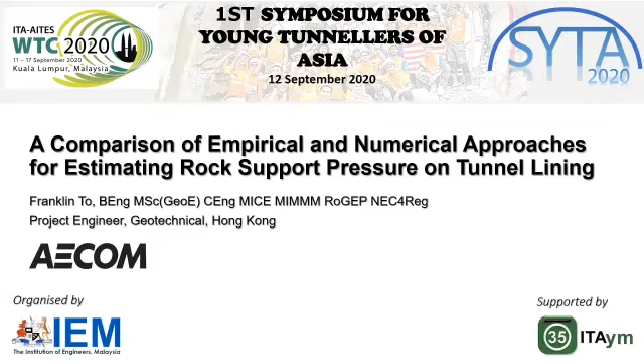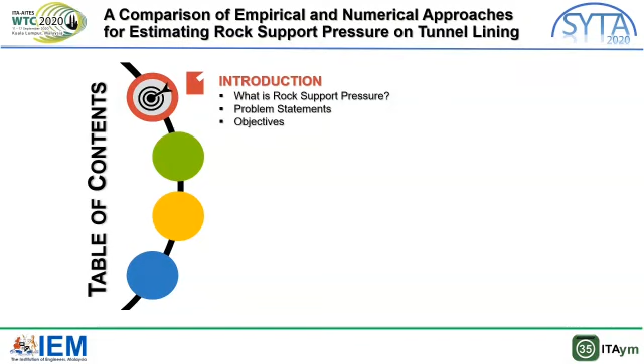Today's presentation is divided into 4 parts. First, I'll introduce the background of this study. Then I will quickly go through some previous literature. After that, I will talk about the methodology for this study. And finally, the results and discussions.

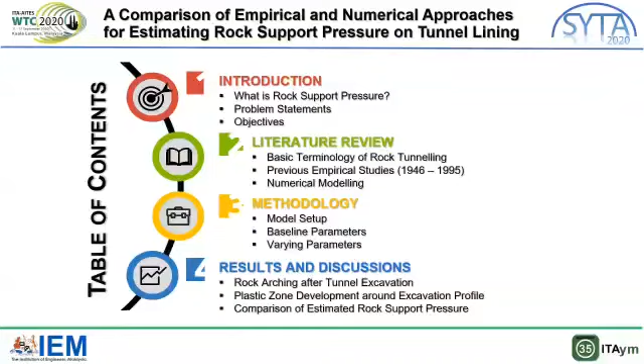So first, the introduction. Hong Kong is a densely populated city with 7.5 million population. However, less than 25% of the total land area is developed. This is because the remaining areas, highlighted in these red boundaries, are surrounded by hilly terrains, rural areas, and statutory protected areas. 85% of these hilly terrains are underlain by hard and massive igneous rock, such as granite and volcanic tuff. They are favorable for underground space development, such as rock tunnels and rock caverns.

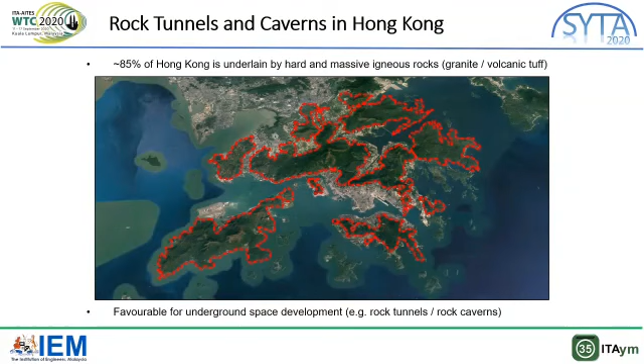Indeed, many railways and highways in Hong Kong were constructed in the form of tunnels, such as the Lion Rock Tunnel on the left, the Tai Koo MTR station in the middle. Most of them are supported by permanent cast-in-situ concrete lining, shown on the right.

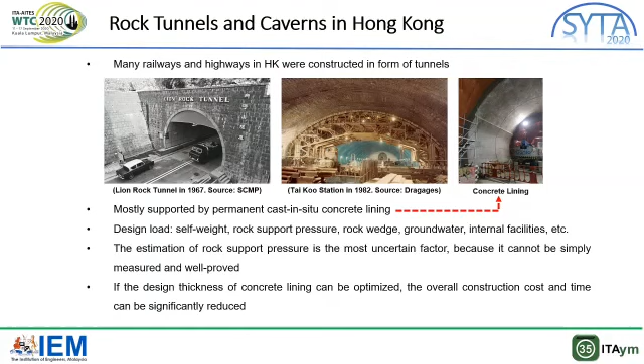Design loadings include the self-weight, rock support pressure, rock wedge, groundwater, internal facilities, and so on. Among these loadings, the estimation of rock support pressure is the most uncertain factor because it cannot be simply measured and well proved. If the design thickness of the concrete lining can be optimized, the overall construction cost and time can be significantly reduced.

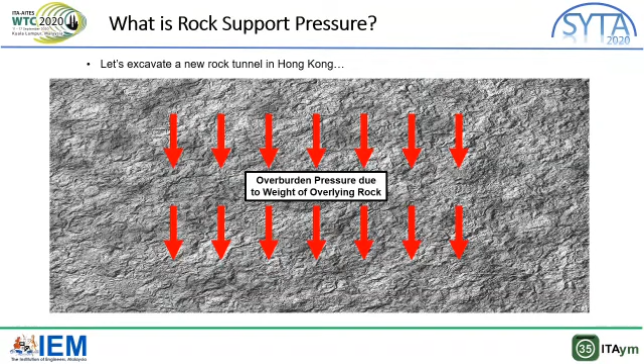So what is the rock support pressure? Let's excavate a new rock tunnel in Hong Kong. Before excavation, the stresses are downward due to gravity from the overburden pressure. However, after excavation, the stresses are redistributed. This loosened rock will exert a rock support pressure, and as engineers, we need to design this support.

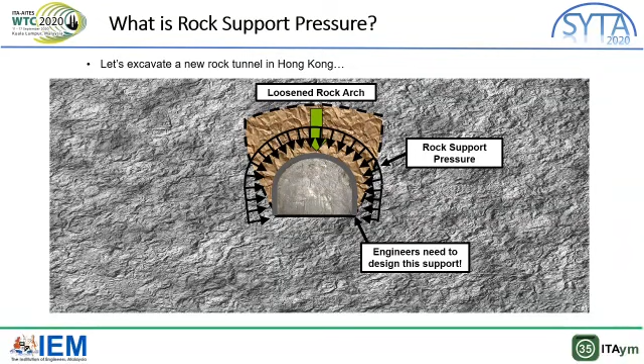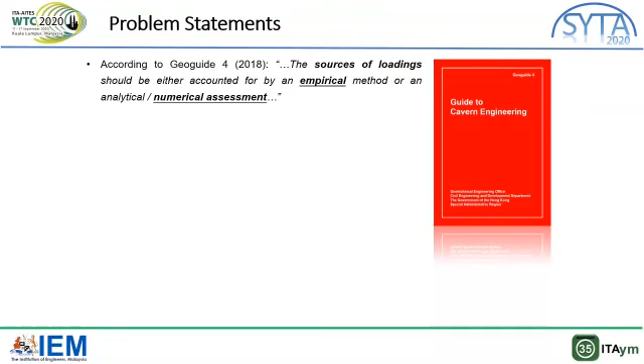According to GeoGuide 4, a guide to cavern engineering published by the Hong Kong government, the source of loadings should be accounted for by either an empirical method or an analytical or numerical assessment. So what are they? Empirical approaches correlate the relationship by observation or experiment. For example, if you get a group of data, you can get an equation with the best fit line of y equal to mx plus c. On the other hand, for numerical modeling, you solve problems by numerical approximation, such as computer modeling with the finite element method or the discrete element method.

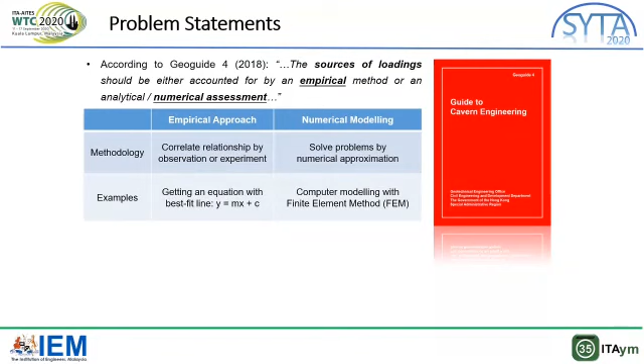So for rock tunnel design, there are 2 major types of parameters. The first is the geotechnical conditions, such as how strong or weak the rock is. The second is the tunnel arrangement, such as how deep and wide we need. So the question to ask today is, are geotechnical engineers estimating the rock support pressure with full consideration of these parameters?

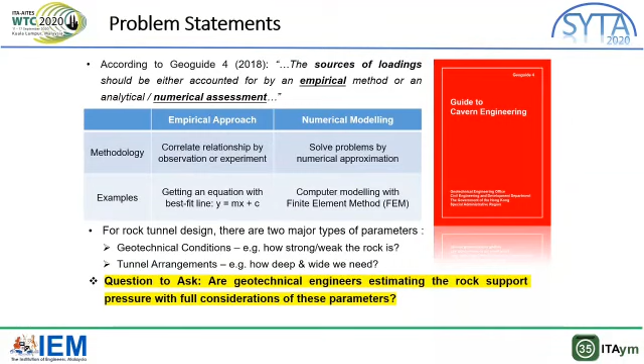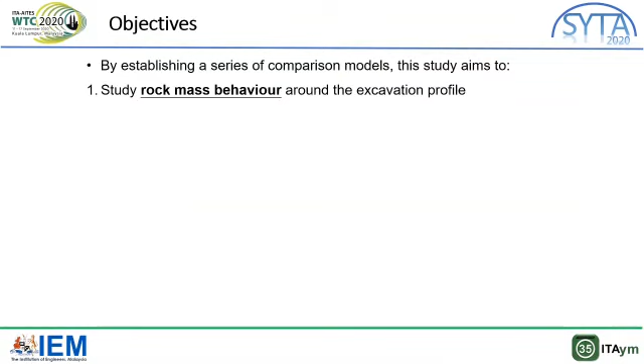By establishing a series of comparison models, this study aims to study the rock mass behavior around the excavation profile, and investigate the difference in estimated rock support pressure using empirical approaches and finite element models. Due to time limitation, I'll only talk about the Terzaghi's and Barton's methods for the empirical approaches, and only the crown pressure from the finite element modeling. And finally, study the influence of missing parameters in empirical equations.

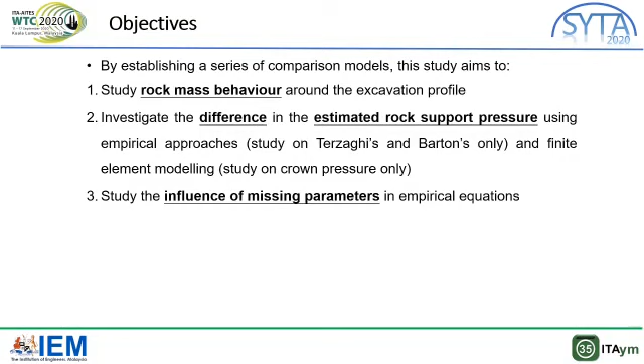So, literature review. Before going into details, I would like to first quickly introduce some basic terminology of rock tunneling. First, the tunnel width, which is the maximum width of the excavated profile, including the tunnel lining.

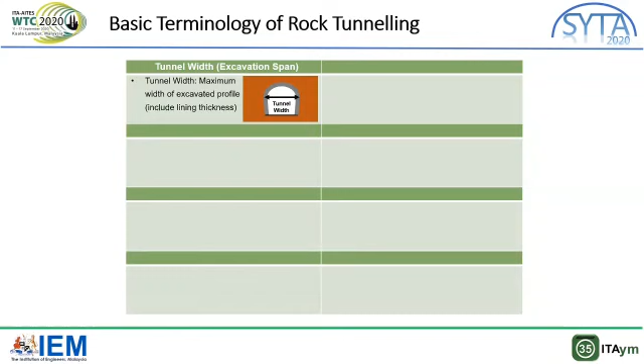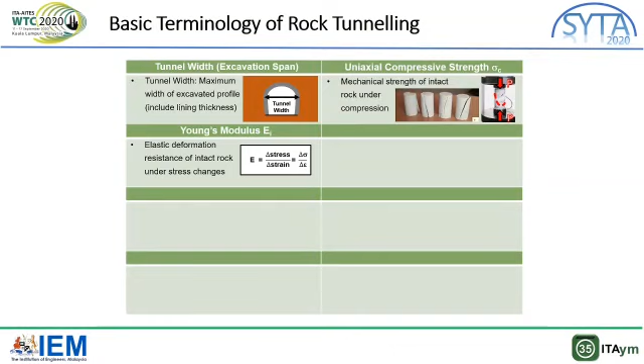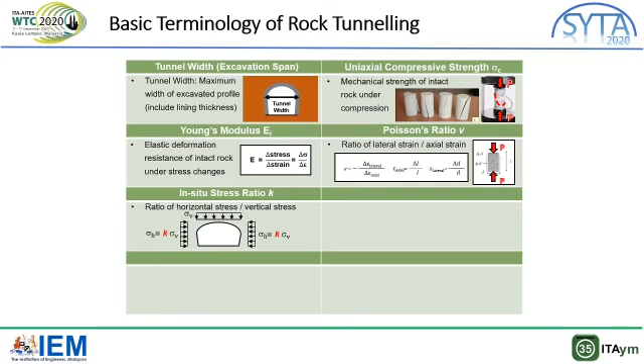Uniaxial compressive strength, or UCS, is the mechanical strength of intact rock under compression. Young's modulus is the elastic deformation resistance of intact rock under stress changes. Poisson's ratio is the ratio of lateral strain divided by axial strain. In situ stress ratio, the K value, is the ratio of horizontal stress divided by vertical stress. A higher K value means higher horizontal stresses.

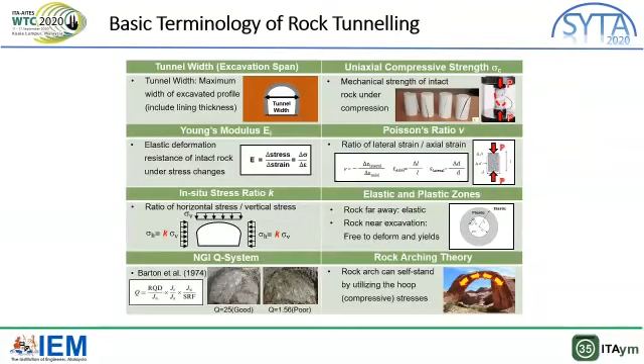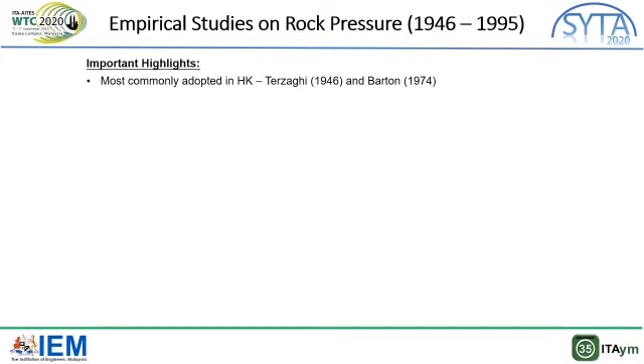I have extracted some important highlights of previous empirical studies. The most commonly adopted ones in Hong Kong are Terzaghi's rock arching theory from 1946 and Barton's Q system from 1974. These studies were carried out by collecting field data of relatively small tunnels, and the design loadings are actually from back analysis of installed tunnel supports.

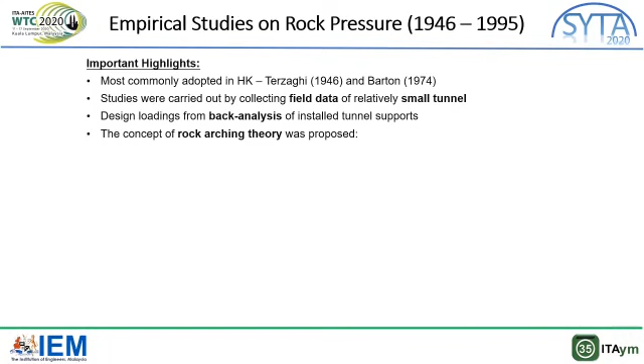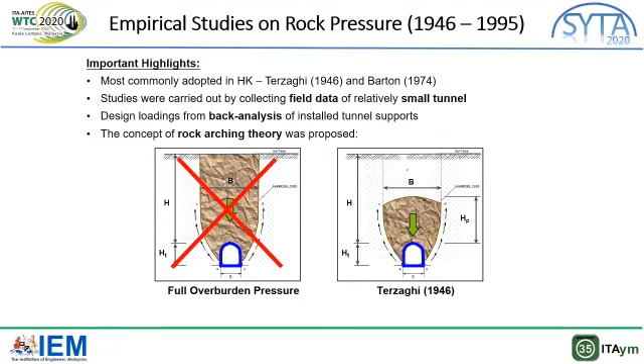And the concept of rock arching theory was proposed. So instead of taking all the ground loadings, the full overburden pressure up to the ground surface, the tunnel is only taking the loading from this loosened rock arch zone by considering the arching effect. They are very fast and easy to use, and therefore they are still widely used in the world nowadays.

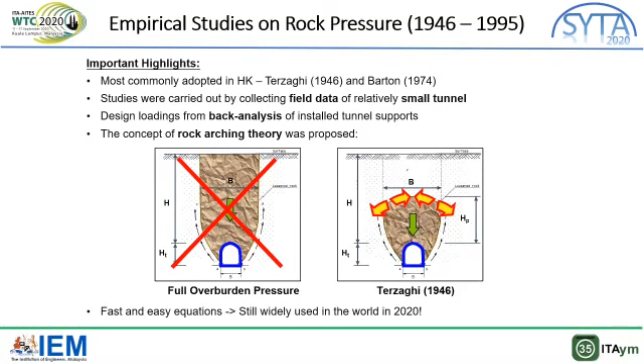This shows the input parameters into the empirical equations by Terzaghi and Barton. As you can see, the UCS has been considered somehow in the SRF by Barton. The tunnel width has been considered by Terzaghi, and both approaches have considered rock mass quality. However, none of them have considered Young's modulus, Poisson's ratio, in-situ stress ratio, and also tunnel depth.

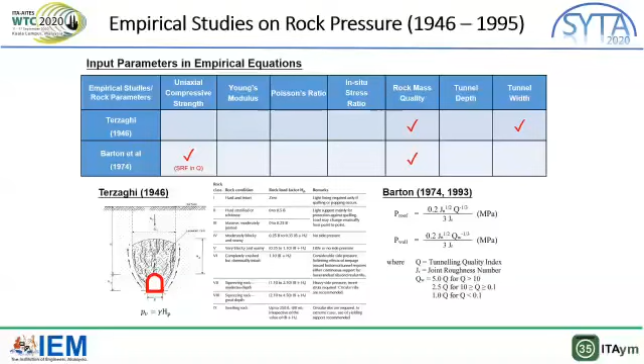On the other hand, numerical modeling can be used to handle engineering problems with great complexity, such as surcharge, complex geology, influence to existing tunnels, excavation sequence, composite structures, and 3D problems.

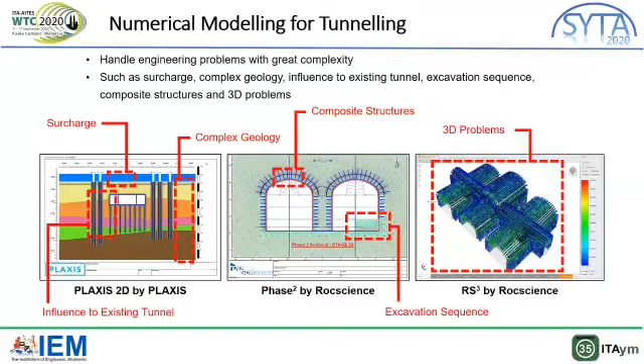So, methodology. The first thing is model setup. Comparison models were established using the software by Rocscience, which is Phase 2. Something to mention is that all geotechnical software in Hong Kong to be used for design works has to be pre-approved by the Hong Kong engineering government authorities. The geotechnical and geological parameters and also the tunnel profile are based on the Hong Kong Highway project.

So there are 4 stages of modeling. Stage 1 is the initial stage. Stage 2 is the excavation stage. Stage 3 is the support installation. And stage 4 is the full excavation.

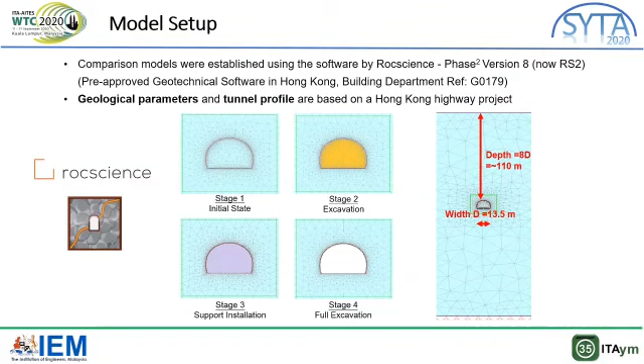The tunnel span is approximately 13.5 meters, and the tunnel depth is 8 times the excavation span, which is approximately 110 meters. These are the baseline parameters: the UCS is 75 MPa, Young's modulus is 30,000 MPa, the Poisson ratio is 0.3, and the Q value is 10, which is fair to good rock.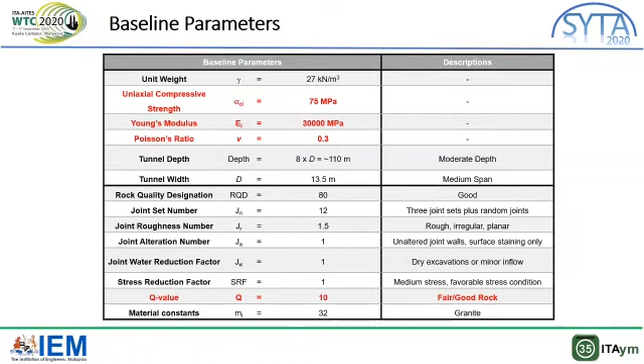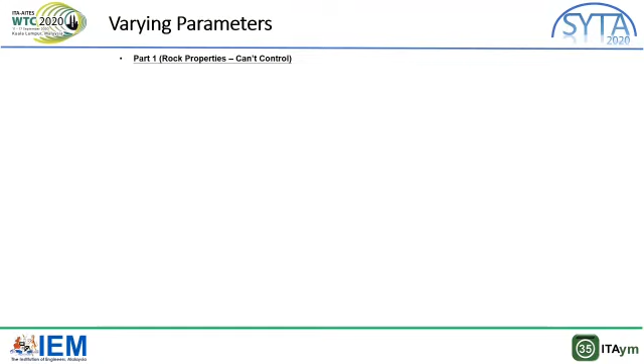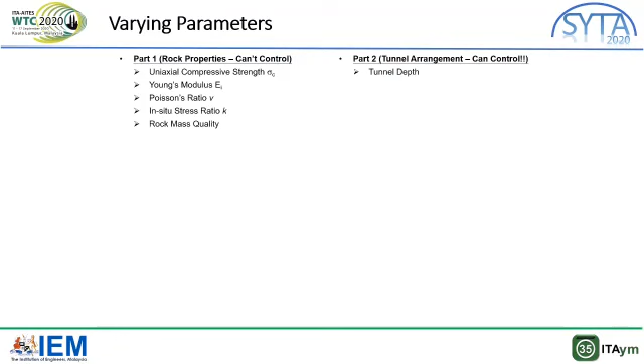This study is divided into two parts. The first is rock properties which we cannot control, including UCS, Young's modulus, Poisson ratio, in-situ stress ratio, and rock mass quality. The second part is tunnel arrangement which engineers can actually control, which is the tunnel depth and tunnel width. This is a summary table summarizing the baseline and varying parameters.

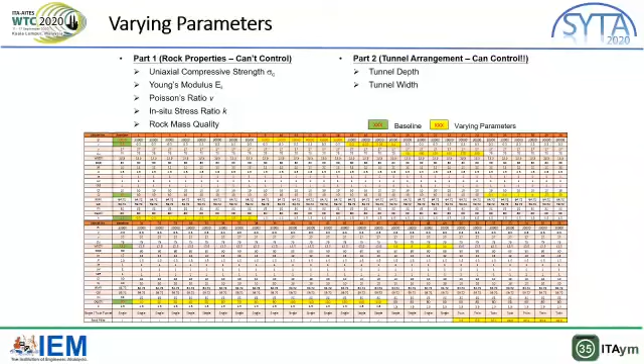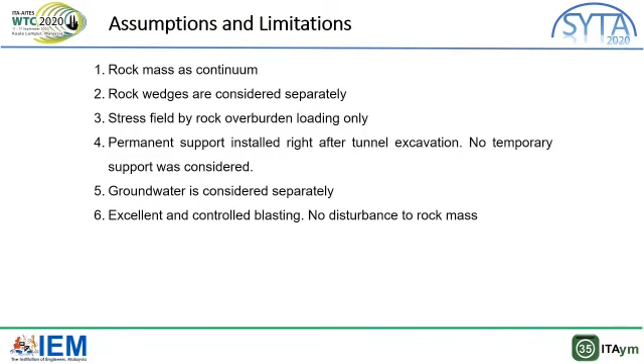And finally, with advanced technology, we assume excellent and controlled blasting, and therefore there is no stress disturbance to the rock mass. Finally, the results and discussions.

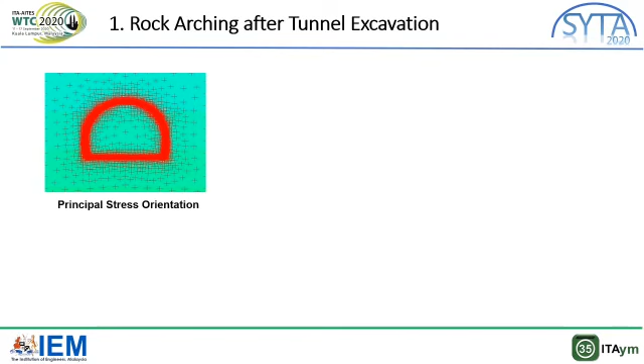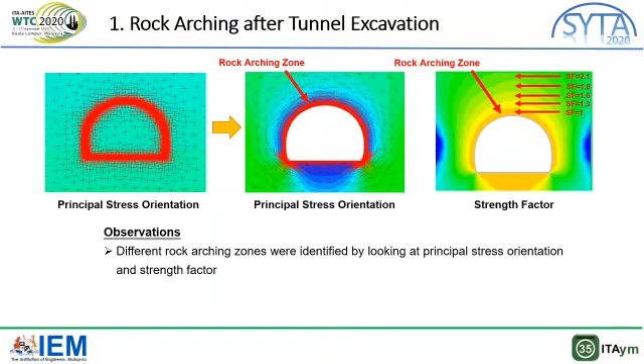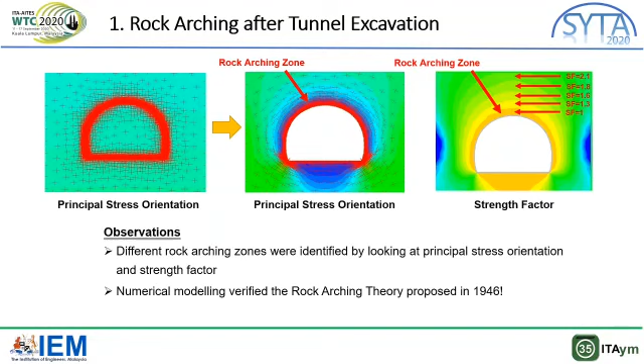Also, when we look at the strength factor, near the excavated profile the strength factor is around 1. As the rock mass moves away from the opening, it increases radially from orange to yellow and finally to green. So we also observe the rock arching zone here. Different rock arching zones were identified by looking at the principal stress orientation and strength factor, and therefore the numerical modeling actually verified the rock arching theory proposed in 1946.

These show the stress contour at different tunnel depths, by the multipliers of excavation span D, from 1D to 15D. Similarly, rock arching zones were observed in these comparison models. This implies that the permanent lining of a rock tunnel at moderate depth is only supporting the loosened rock mass after excavation, instead of the full overburden pressure to the ground surface. However, by carefully looking at the color of the stress contours, we can see at 15D they are more green and yellow. We can observe a slow increasing trend of the support pressure with increasing tunnel depth.

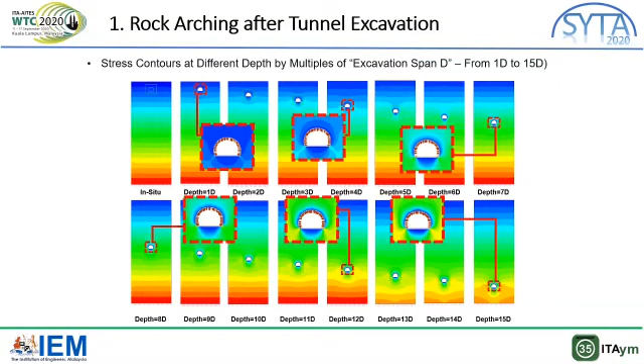This shows the plastic zone development around the excavation profile at different tunnel depths, from 1D, 5D, 7D, 9D, 12D, and 15D, from the upper left to the bottom right. We can see that the extent of the plastic zone increased with depth. The plastic zone first developed at the two sharp corners near the invert level, then the crown, and finally the wall and the invert, and eventually the entire excavation profile.

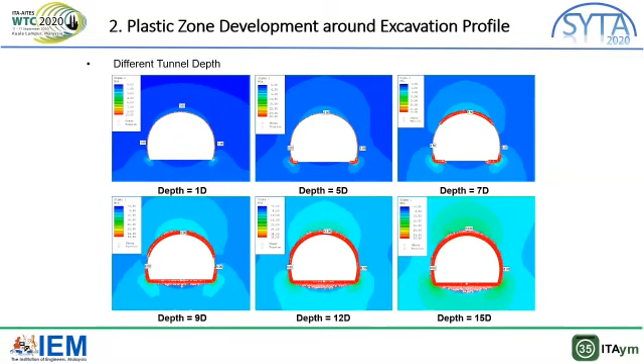This shows the plastic zone development for different rock mass quality, from Q equal to 0.1, which is very poor rock, increasing until Q equal to 40, which is very good rock. Obviously, the excavation in poor rock gets more plastic zone.

When the rock mass quality increases, the plastic zone disappears first at the wall and invert, and then the crown. But even for very good rock conditions, the plastic zone still exists at the sharp corners near the two inverts, where we get the stress concentration due to the horseshoe profile.

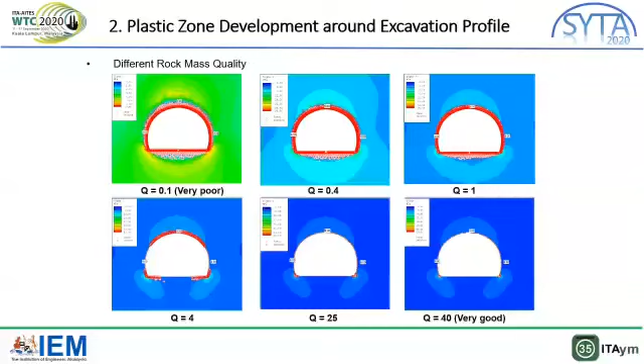So these graphs show the relationship of rock support pressure at crown with different UCS, Young's modulus, Poisson ratio, in-situ stress ratio, rock mass quality, tunnel depth, and tunnel width. The red color is the results from the finite element model. The orange one is from Terzaghi, and the green one is from Barton.

As you can see, finite element estimations in red color are smaller than all empirical approaches, except the middle one with poor rock quality. Barton's estimation in green color is the closest one to the finite element modeling. Terzaghi's estimation in orange seems to be too conservative because it is much larger than the results from the finite element model.

So in general, we observe that the UCS, Young's modulus, Poisson ratio, and the tunnel width are not significantly affecting the rock support pressure at crown. On the other hand, the in-situ stress ratio, rock mass quality, and the tunnel depth are quite sensitive to the rock support pressure at crown.

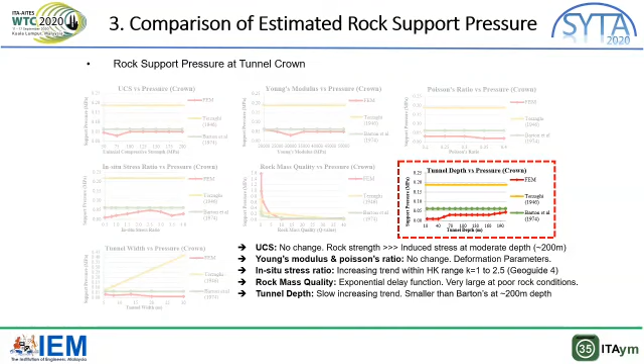For tunnel depth, we observe a slow increasing trend. However, the estimated pressure at tunnel depth of about 200 meters was still smaller than all empirical approaches. And the estimation by Barton is still therefore conservative to be adopted for a tunnel lining at a moderate depth.

For tunnel width, some previous studies confirmed that it affects the pressure only when a flat tunnel roof was used or at very poor rock conditions. This result shows that the influence of tunnel width for horseshoe profile on the pressure is actually not significant.

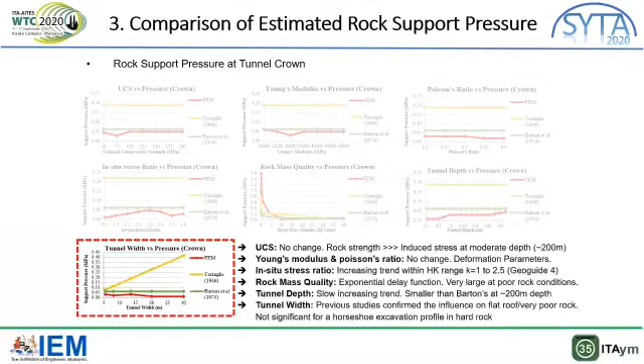Finally, the conclusions and recommendations. First of all, empirical approaches are conservative to estimate the rock support pressure at crown, but they could be too conservative, which means not cost-effective in some cases, such as the adoption of Terzaghi's rock arching theory.

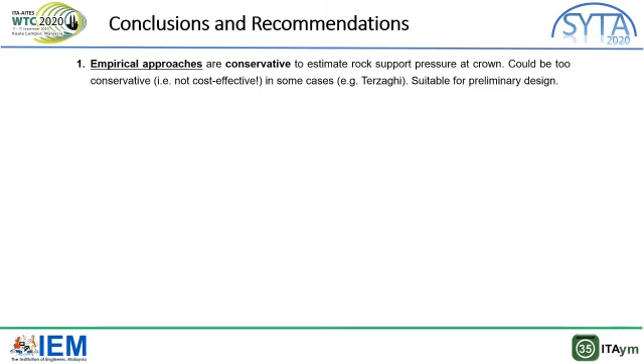Therefore, they are suitable for preliminary design. Numerical modeling should be used for design optimization during the detailed design stage to save construction cost and time when more GI data is available.

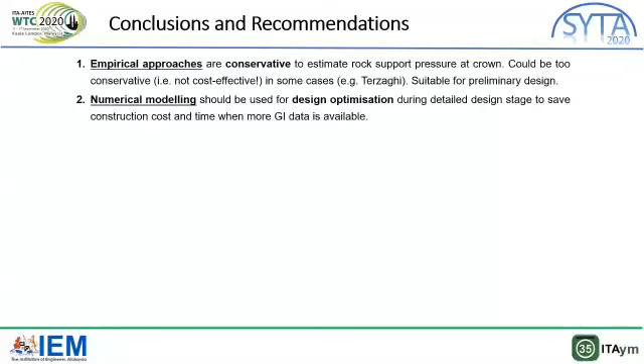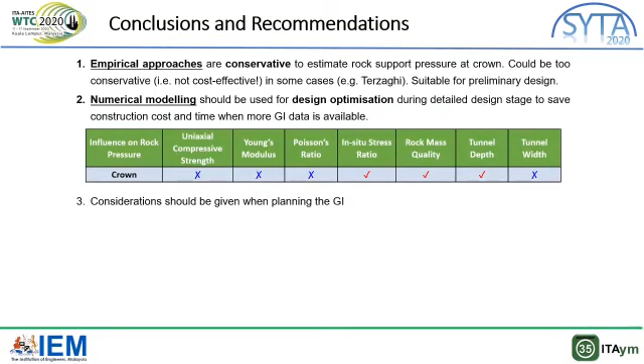This shows the summary table of the influence of different rock parameters on the rock support pressure at crown. As we can see, UCS, Young's modulus, Poisson ratio, and tunnel width are not significant. But for the in-situ stress ratio, rock mass quality, and tunnel depth, they are quite sensitive. Therefore, considerations should be given when we plan the GI.

Some interesting fact is that we usually order a lot of lab tests for UCS, Young's modulus, and Poisson ratio. However, they are not very useful to estimate the rock support pressure, so therefore it is a good chance for us to revisit which kind of GI we really need.

For the in-situ stress ratio, it involves very expensive field tests, but I do suggest carrying out a field test if we are doing a large-scale tunnel project.

For rock mass quality, we could carry out the HDC, which is the horizontal directional coring along the tunnel alignment, so that we can have a better understanding of the overall rock mass quality, especially the location for different fault zones.

Tunnel depth, as a geotechnical engineer, to be honest, there's nothing we can really do because it is somehow governed by the transportation arrangement, such as the tunnel portals having to connect different roads and different traffic sightline requirements.

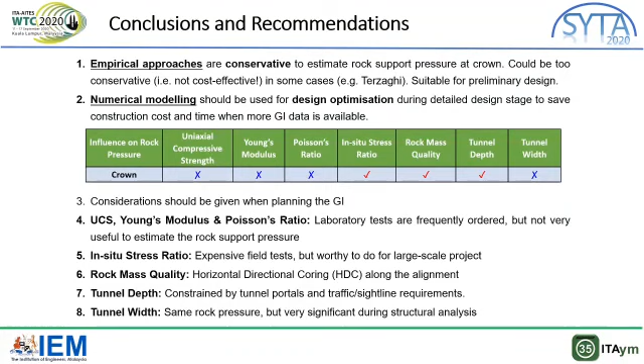Finally, for the tunnel width, although it gives the same rock support pressure, during the structural analysis we will eventually get a higher bending moment. So therefore, we still have to carefully look at what tunnel width we actually need.

So that's the end of my presentation. Feel free to ask if you have any questions.